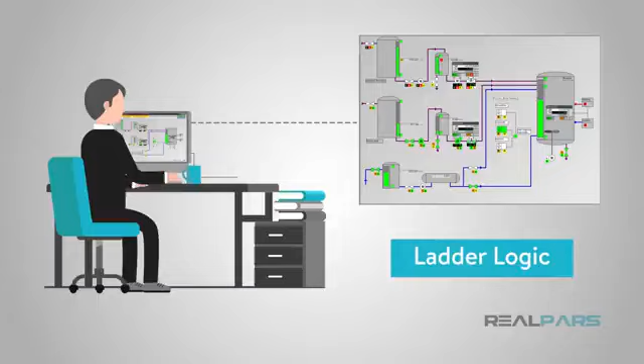If you are involved in any way with industrial machinery, you almost have to have heard of ladder logic. Since there are almost never ladders involved, it probably doesn't make a lot of sense that we call it that. But the reasons for the name are buried in the history of automatic controls.

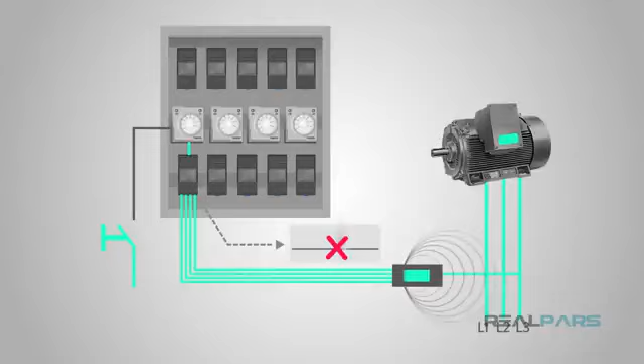At one time, automatic systems were controlled with relays. Relays are electromechanical devices and fail quickly as the mechanical parts wear out and the electrical parts are destroyed as the electricity they switch burns away the contacts. They are big and use lots of electricity, generating lots of heat in the process.

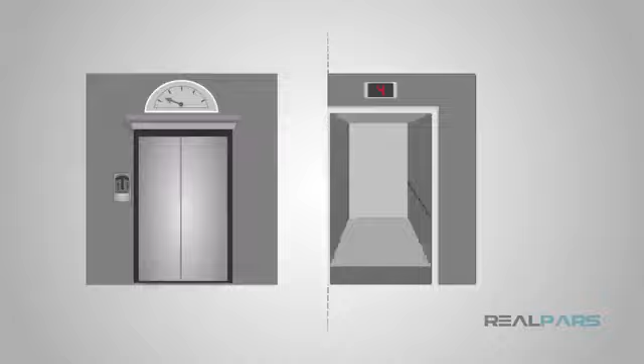At one time, the only automatic device most people ever encountered was an elevator. In modern-day control terms, the elevator is a simple application that is well understood. Even so, a control system implementation in relays was a big, complicated affair.

In order to understand why we call it ladder logic, you need to look at how we document relay logic controls. The actual ladder was the drawing of the control logic, an illustration of how the relays were wired together. Even today, a lot of the conventions that led to the ladders are still in use, and I'll use a recent example drawing to illustrate this.

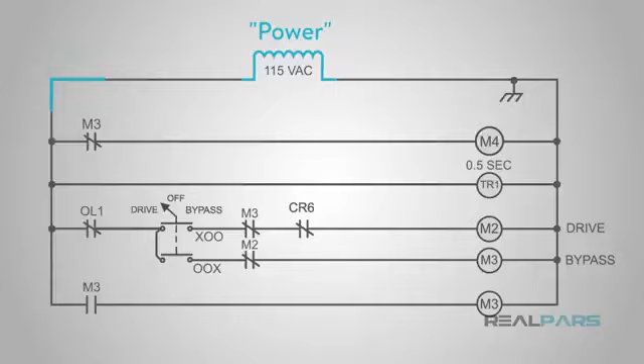Here is a simplified drawing of a control circuit. The appearance is what led to being called ladder logic, since it superficially resembles a ladder. Other drawing conventions that survived into the software version include power at the top of the drawing, with the hot or power rail going down the left side, and the neutral rail going down the right side.

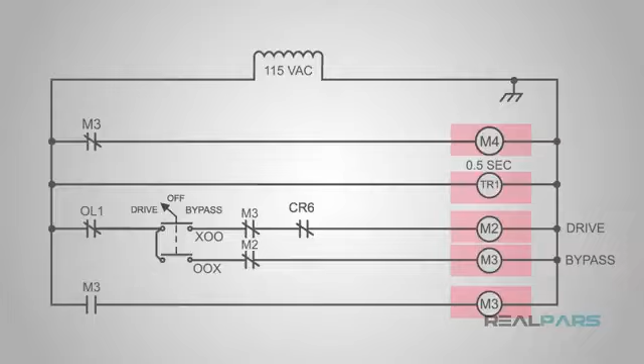We also have contacts or inputs on the left, and coils or outputs on the right, so that our power is flowing from left to right. Finally, each of the outputs is on a separate horizontal line, or, in our ladder metaphor, rung. Another convention is that we always descend the ladder. We work from top to bottom.

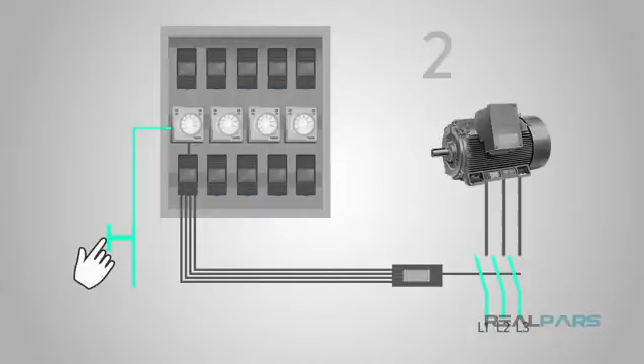Relays are simple devices, consisting of coils and the contacts that they move. When electricity energizes the coil, it moves the contacts, connecting some and disconnecting others. The lowest level elements of ladder logic mimic those relay functions. Here is an example of the logic from the example drawing I've been using, rendered in Rockwell Software's Studio 5000.

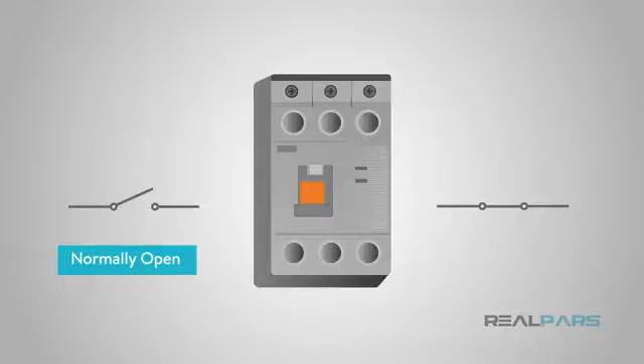Output contacts on real-life relays are usually called normally open and normally closed. Normally open means that when the relay coil is not powered, normal for a relay, the contact is open or not conducting. Normally closed is the opposite. When the relay coil is off, the contact is on or conducting.

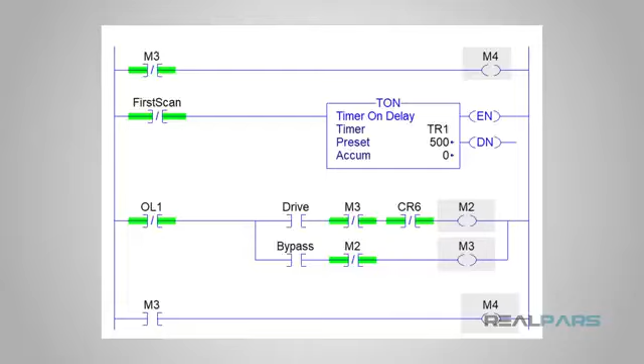So here's our software representation of a normally open contact. The drawing symbol and the symbol in the software are pretty much the same. Normally closed contacts are also very similar, just a representation of two separated contacts. Finally, the relay coil. Not quite a full circle like the drawing, but close enough to get the point across.

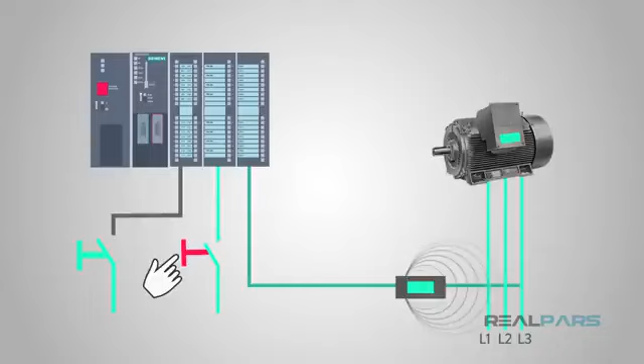For the things we have described so far to be useful, they have to make other things happen. For instance, if the machine is ready to run and we push the auto start button, we want the machine to start continuously running until we push the auto stop button. Here is our English sentence written in ladder logic. Let's take that picture apart and look at the English with it.

If the machine is ready to run, we have a contact called ready to run, and we push the auto start button, auto start contact, with the two contacts in series so that if both of them are on, then we energize the auto running coil.

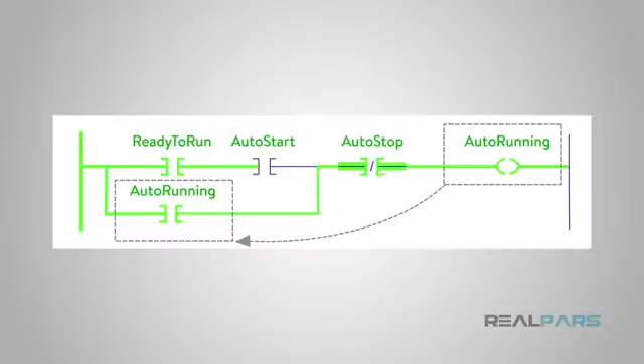When we energize the auto-running coil, that also energizes the auto-running contact, which keeps the auto-running coil energized, continuously cycling, until we push the auto-stop button. Since that is a normally closed contact, when we push the button, it stops conducting, which de-energizes the coil.

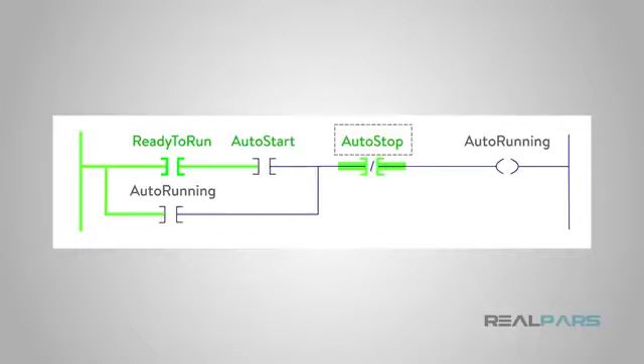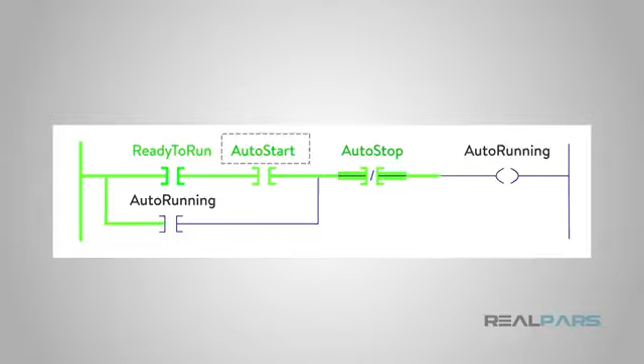The circuit we just drew in ladder logic, and the one that we could have drawn on paper, is in thousands of motor starter panels all over the world. They add stuff to it, but the basic circuit and meaning are the same. Push the start button, the motor runs, until you push the stop button. Welcome to real-world ladder logic.

Since the real world is more complicated than just on and off, we need some more complicated functions to deal with it. One of these was in the original drawing I started this off with, and I wanted to come back and cover it. One of the most common functions, other than on and off, is a time delay, something that waits a specified period of time before turning on or off. We have had one in this drawing, although its output isn't specified.

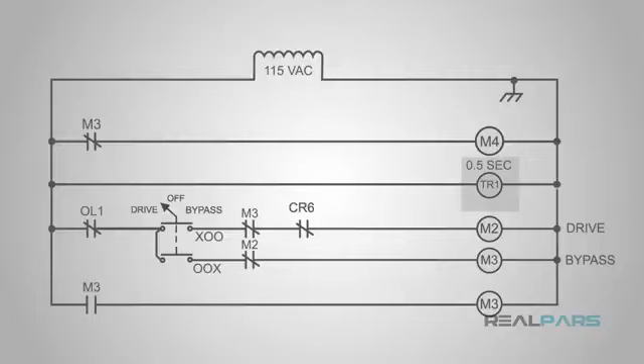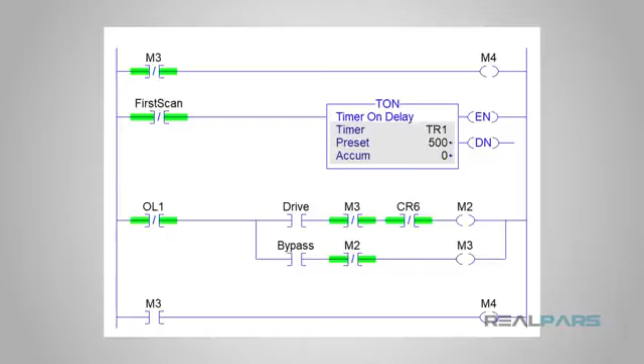We call these timing relays when we use them in a circuit like this drawing. In the ladder logic program, we must specify all the different needs for a timer. In our Allen-Bradley ladder logic, we have an on-delay timer, which is labeled TON. The amount of time it delays is specified in milliseconds, so the half-second timer, in our example, becomes 500 milliseconds.

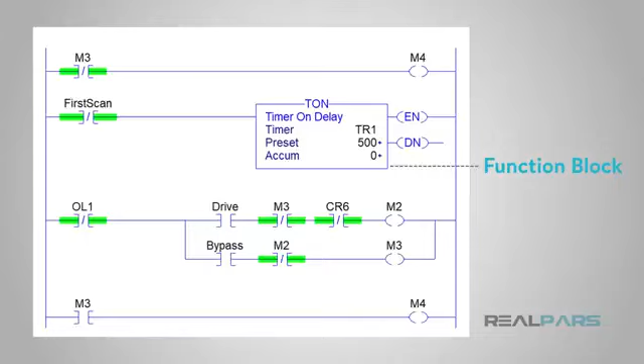These sorts of more complex functions are what we call function blocks in ladder logic programming. The functions contained in these blocks and how they operate vary between PLC manufacturers, and even within a given manufacturer's PLCs, they may differ. So this ends our introduction to the history of ladder logic and how it got its name. As the history of these systems recedes further in the rearview mirror, it's always helpful to look back and see where we have been.